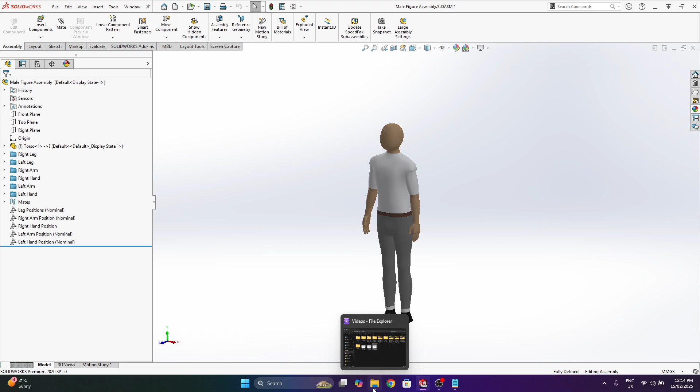You should have received a downloadable text file containing a link to a Google Drive folder, which you can download, containing this model and all the necessary files. There's also a link to this video you're watching.

Once you download that file, I'll navigate to it. It'll be labeled as Male Human Figure 1.0.

If you open that up, Male Figure Assembly is the main assembly, which I have open here. Male Master Model 1.0 is the skeleton base model, which I built up using surfacing features and then split the body up into different parts. Those different parts are then saved in this body parts folder.

For anyone interested, I used the insert part feature where I brought in the master model and then deleted away the individual body parts, and had axes and sketches to position them accordingly in the assembly.

I also have step files just in case someone doesn't have SOLIDWORKS. You can open up universal step files, but you do lose the mate positioning capabilities.

I also have a clones folder. In this case it contains 2 clones of the main assembly, in case you want to position multiple of these figures in some kind of scene, perhaps one standing, one sitting, and so on.

Finally, there's a README text file which more or less contains everything I'm going through in this video.

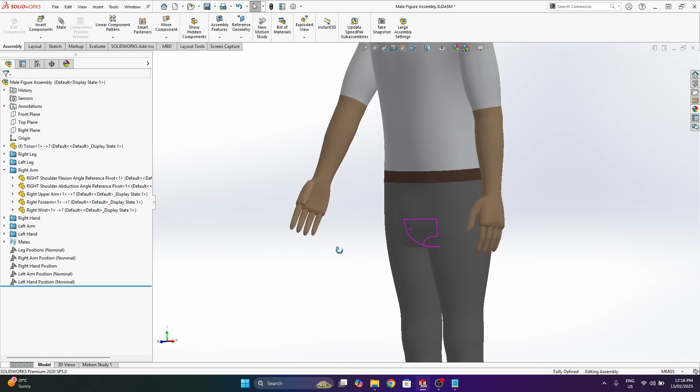Let's say we open up the main assembly and want to adjust the position of this model. You could click and drag things, but because there are so many mates linked together, you're not really going to get any good control that way. So I have these mate controllers, and for the legs, for example, if I right click it and say edit feature, it opens a list of all the individual mates that I can adjust, and they're all labeled. So hip flexion angle, I can come in and adjust that.

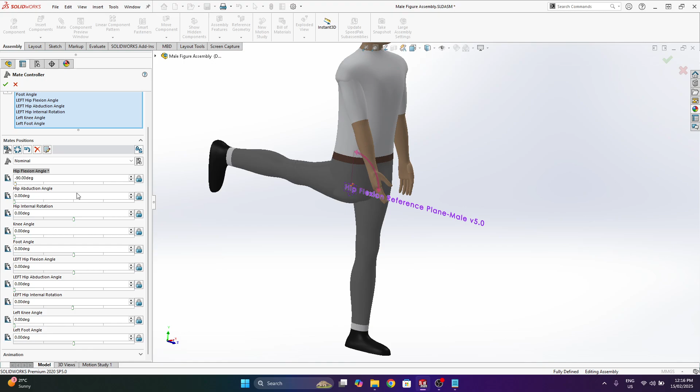Sometimes these are not fully stable, SOLIDWORKS seems to have a mind of its own sometimes. So if it's not snapping to the position you want, you can just manually type in the angle, and that seems to always work. You can kind of go through these and have a bit of fun playing around with them.

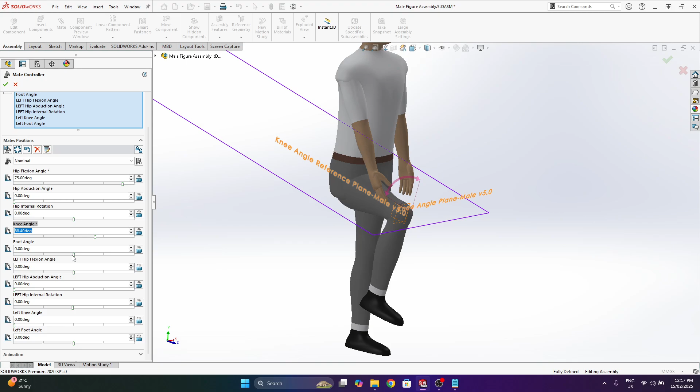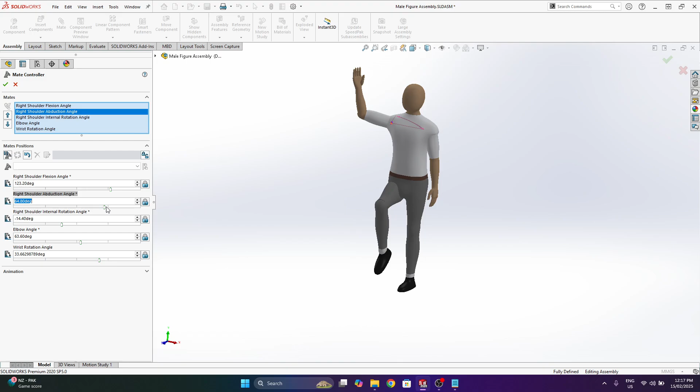I'm just going to do a quick demonstration here. Maybe I want to position the right arm to be pointed up, bending the elbow and also rotating the shoulder out like that. You can also go into the hand positions.

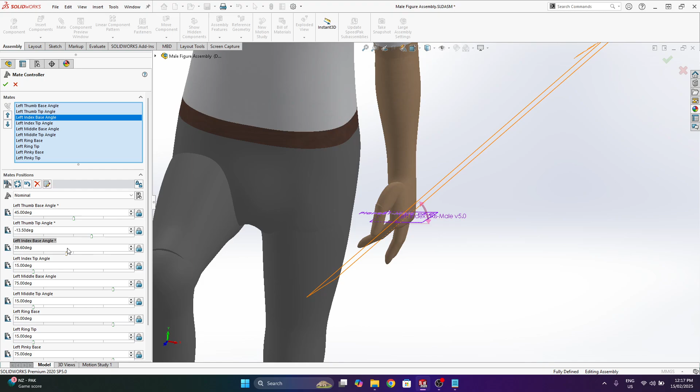Some things are simplifications, like the fingers, which only have 2 degrees of freedom, so not quite as complicated as our hands, but still a pretty reasonable amount of adjustment. Say I position this around, but I want to bring everything back to the nominal position.

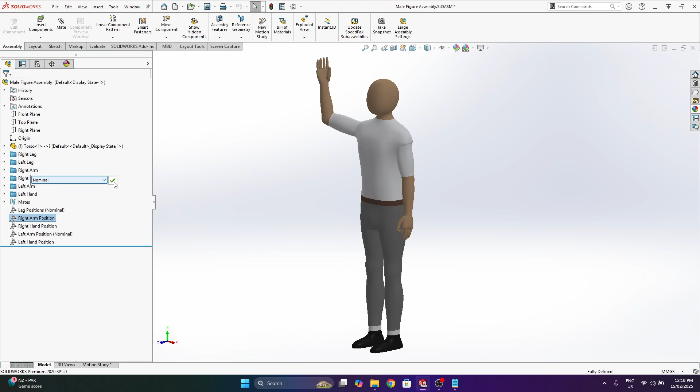I can right click on the mate controller, and in this drop down box, hit nominal for the nominal position, then hit the green tick. I can go through these, just in case you ever get to some kind of wacky position and you want to get back to the base.

I'm going to open up one of my scenes where I positioned a few of these with the car. Again, this is a pretty ridiculous scene, but just for demonstration purposes.

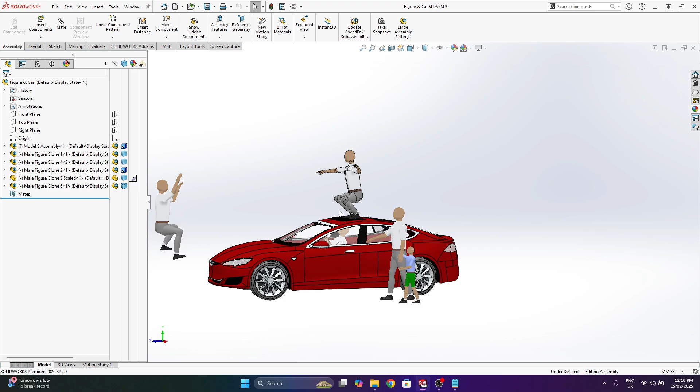I've actually saved these as different clones because if I just put in the same copy of the base assembly, when I adjust the position of one, they're all going to adjust accordingly. So say, for example, I wanted to bring in a new guy.

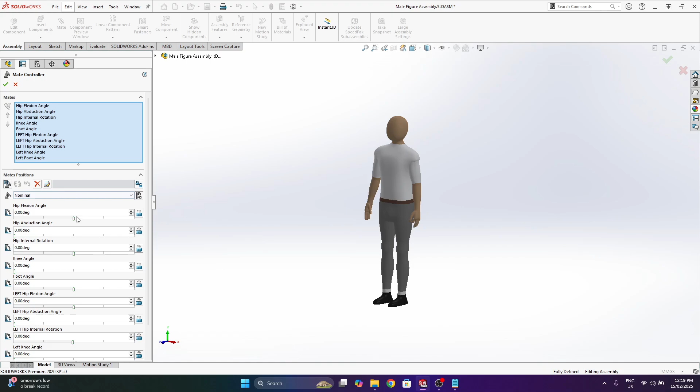Just for demonstrational purposes, let's make him do some kind of weird position like this. Then I'm going to save as a copy, go into my clones folder, and save as clone number 8. Hit save, give it a moment. I'll keep the original open.

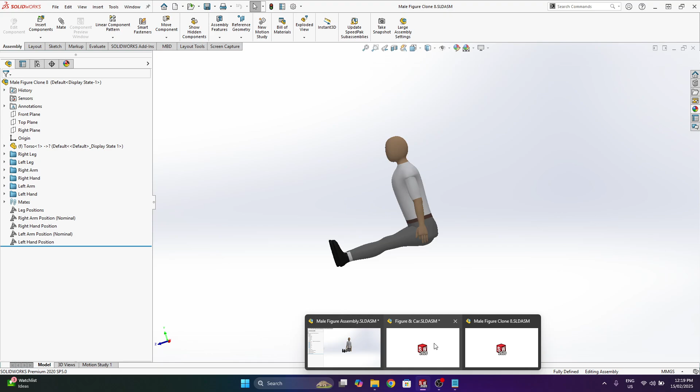I'm going to go to my scene I'm working on, then insert component, insert number 8. So I can position this guy how I want. Let's make it so we want him sitting on the front bonnet of the car.

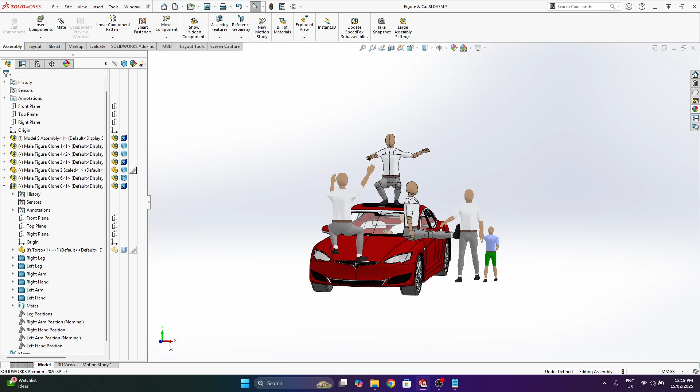Now let's say we want his knees to be bent. We can select him and then go down to the mate controllers relevant to that model, go into leg positions, and adjust the knee angles accordingly. Something like that, and then hit OK.

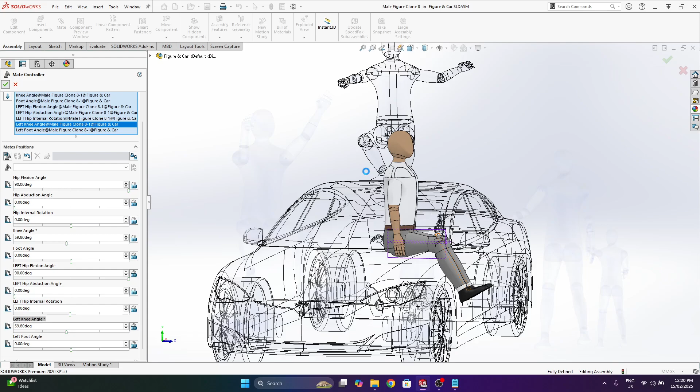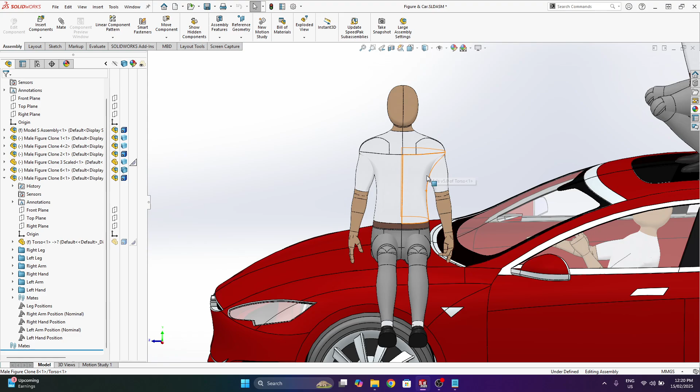Obviously I could go through all the other ones, but it can be a bit time consuming playing around with this. You may have noticed this one has these kind of parting lines along the surface boundaries, which is just representative of the surfaces used to make this model. There's no real way in SOLIDWORKS to hide these and only keep the outlined edge visible.

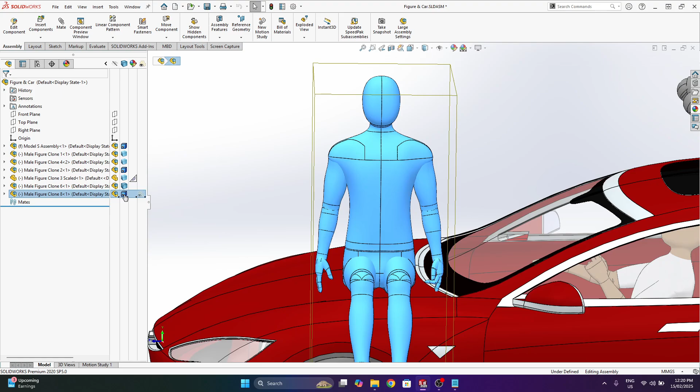But what you can do is, in your assembly tree, click on this little arrow pointing to the right, which brings up display adjustments for each subassembly. I'm going to click on this box and change that one to shaded. As we can see, now we're just getting the base surfaces, so you can adjust that depending on your preferences. I haven't done that for the car model, but have done that for most of the figures.

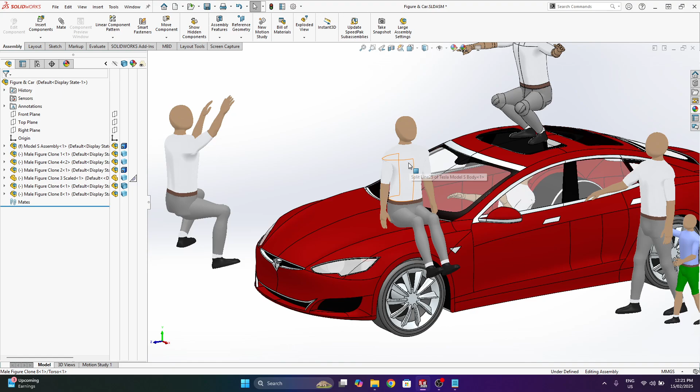Another thing we can do is scale down one of these models, in this case to represent a child. Unfortunately, there's no easy way as of yet for me to scale the whole assembly without throwing off the mates. I might discuss that in a more detailed video on my YouTube channel.

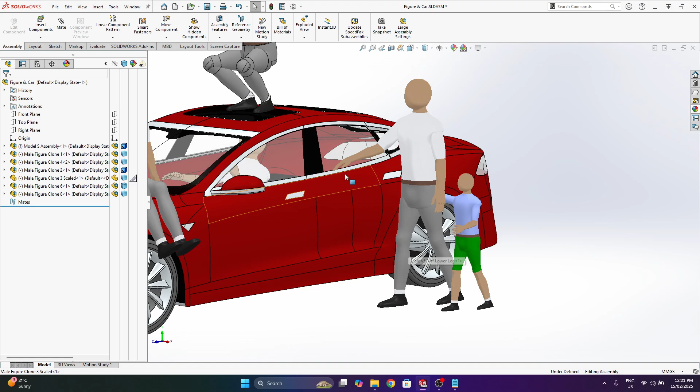But the workaround I have at the moment is that once I have a saved clone, say this male figure clone, I could save that as a multi-body part. So I'm just going to save as, and instead of an assembly, save it as a part. That's going to freeze it in this position.

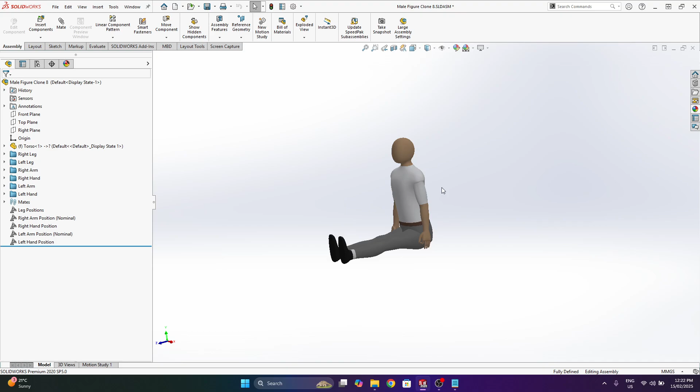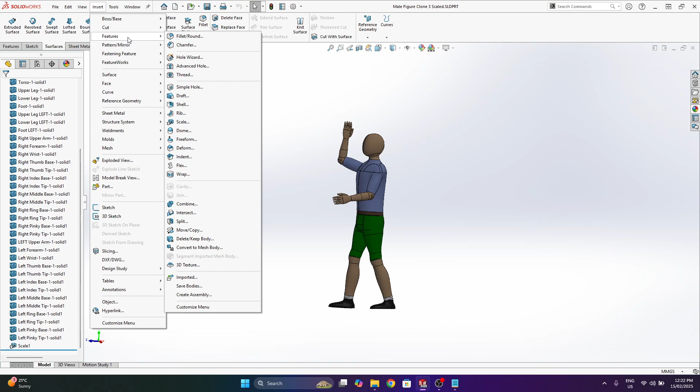So for example, I'll open up this scaled model. It brings everything in as solid sort of parts, but then I've applied a scale feature. I just did insert, features, and scale here, and scaled that down to something smaller, 60% in this case.

The negative of this is that you then can't reposition the mates of the multi-body part. So you have to reposition the assembly clone how you want it, then save it as the multi-body part. If this is popular, I'll see if I can work on a fix going forward to make it a bit more smooth.

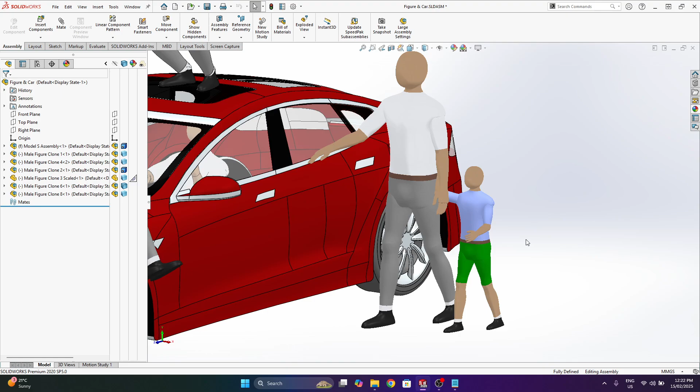One benefit of that approach is that I can come and change the appearance of the multi-body part. Let's say we want this child to be wearing a red shirt. I'm just going to drag red onto that face.

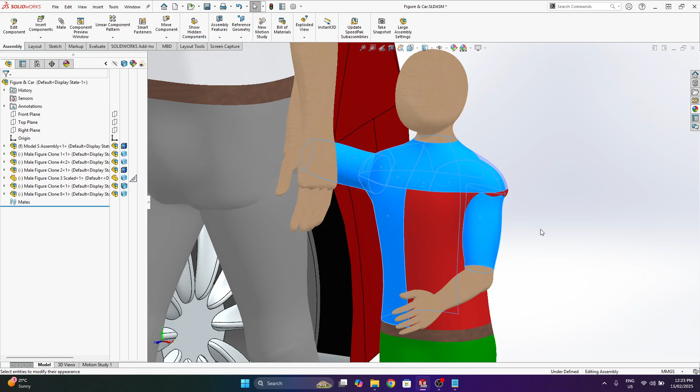What I can do then is right-click that and hit copy appearance, and while holding down Control on my keyboard, select all the other surfaces that I want to be the same color or same appearance, and then hit paste. I'm going to just do Control Z to undo that.

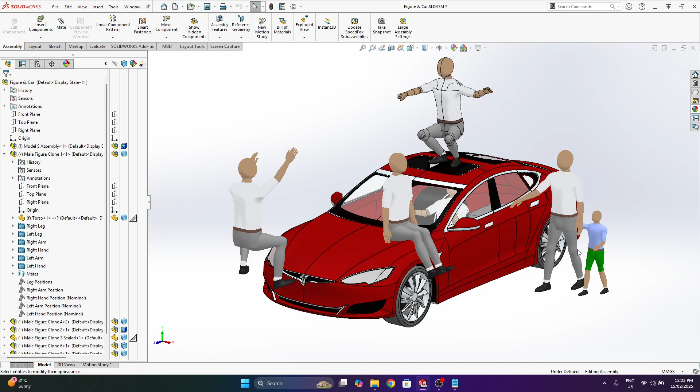For whatever reason, if I do that just on an assembly clone, like if I paste onto this guy's shirt, it kind of updates all of them. Even though they are saved as separate assemblies, they're all referencing the same base model, I guess. So that's another thing to keep in mind, to be aware of.

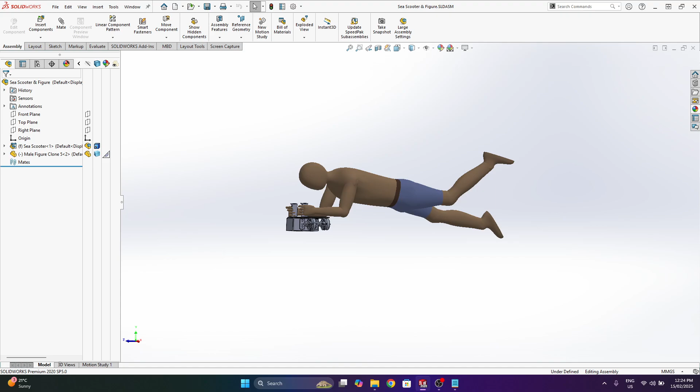I'm just going to see if there's one more example I can show you. Just opening it up quickly. While I'm doing that, I'm also checking my notes to make sure I'm not missing anything else.

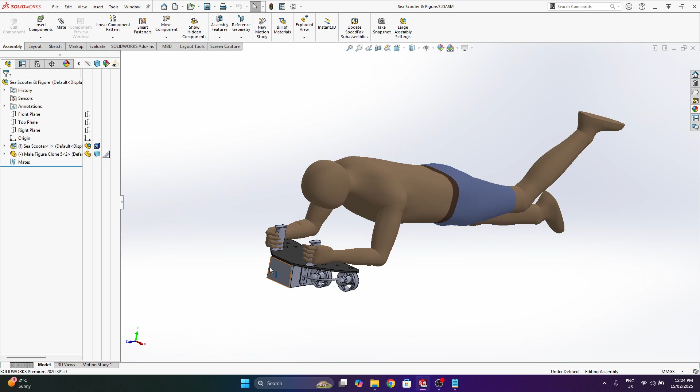This is a Sea Scooter I built, and I have a video of that on my YouTube channel. I brought this figure in to position it on the Sea Scooter, and I'm pretty happy with this. It gives a pretty cool visualization of the product and the scale and the size. I'm just going to hide this for now.

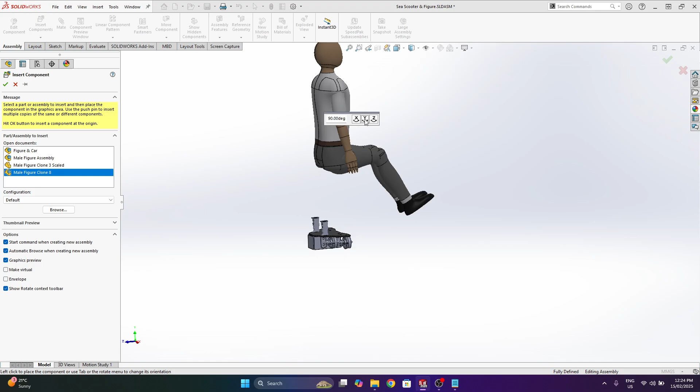Let's say I wanted to demonstrate how you might go about doing this. I'm going to insert the clone we made before, get his position roughly accurate, slide him over, and update the display to just be shaded.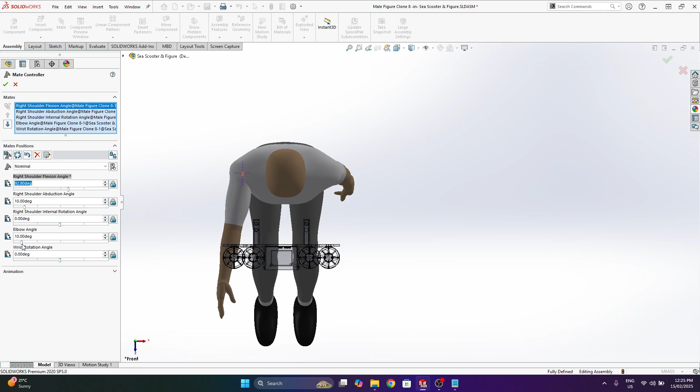Now I'm going to adjust the mate controllers. I'll start with the right arm, bring the shoulder forward a bit, flex the elbow, rotate the shoulder in, and adjust. That's an example where it's not popping correctly to position, but I can see I roughly want it at negative 15 degrees, so I'll just enter that there and it will stay.

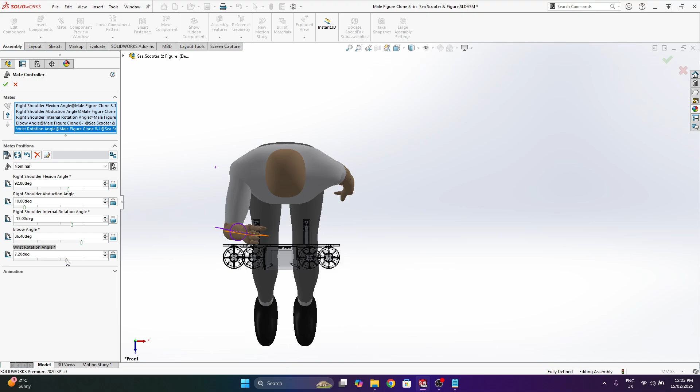That seems to work reliably. Adjust the wrist rotation. I'm not going to go through everything because it can be time consuming, but I could go into the finger mate controllers and update them. This whole guy, I can update with the triad and move him around.

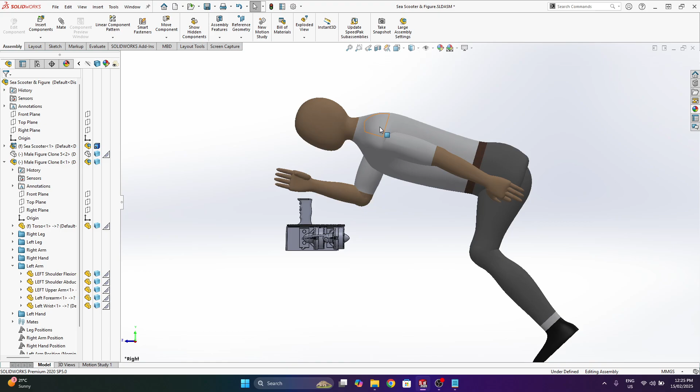You can have a bit of fun playing around with this. More or less that's what I did with this figure, separate to this video, and got it to a nice position. Now this one does have the appearances updated.

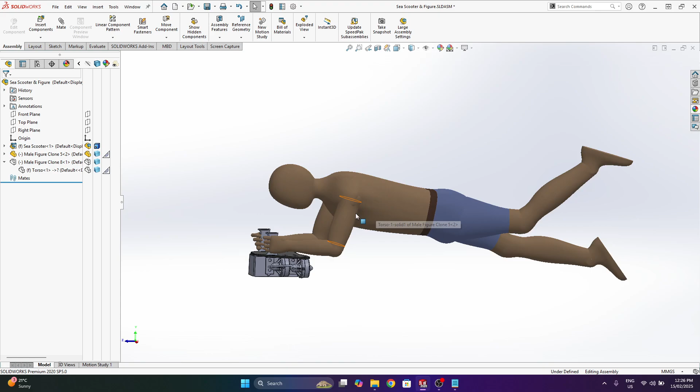As I mentioned before, I actually saved the assembly clone as a multi-body part, and then I went in and adjusted the appearances, just so it doesn't interfere with any of the other ones. But say, for example, I wanted to make this guy kind of nude.

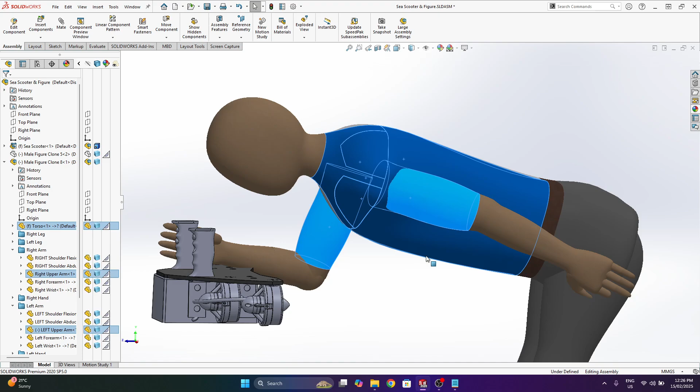What I can do is right click on the skin appearance and hit copy appearance, and then holding control, go through and select the desired surfaces I want to change. Maybe I want to get rid of the appearance on his shirt, and then hit paste. Obviously you need to be careful to go through and select all the correct ones.

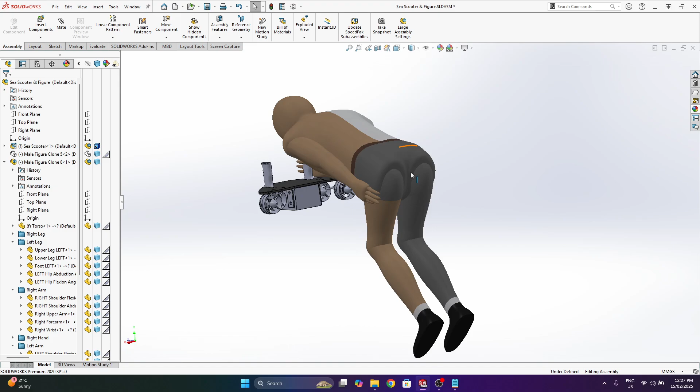I can continue going through. That's something pretty cool. Obviously, there are some limitations with this model. There's discrepancies between some of the joints. The worst is probably the hips. But it's kind of like the best I could do in SolidWorks at this point in time.

That's more or less everything to get you started.